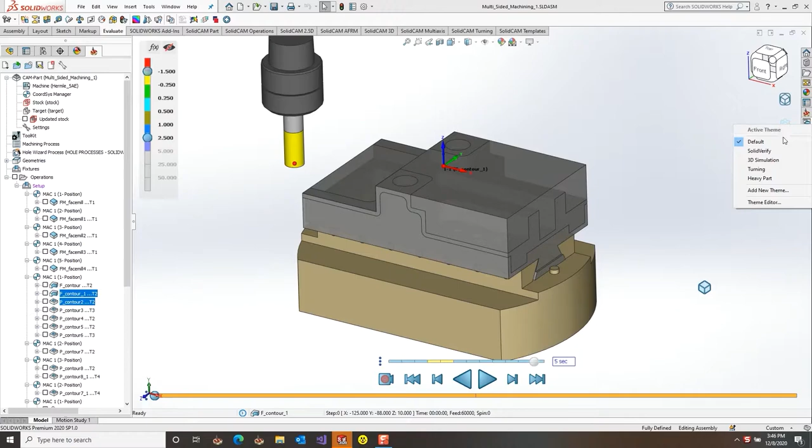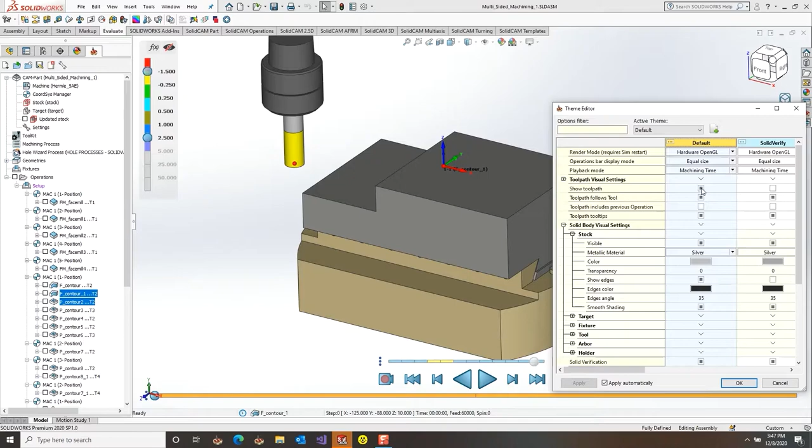Let's begin by making some changes to the existing themes. For the default theme, I would like to make 3 changes. First, I would like to hide the target. Second, I would like to remove the transparency that's on the stock. And then third, I would like to hide the toolpath. Pressing OK will save our theme, and we can play.

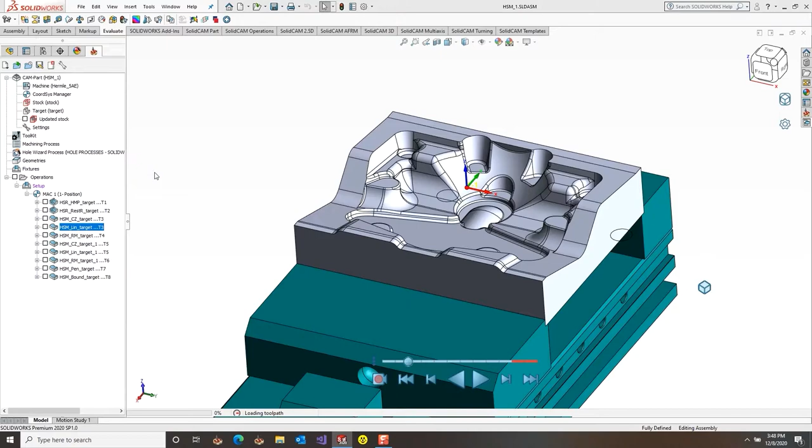I am opening an HSM part so that we can make our own theme for analyzing toolpath. We will duplicate the Heavy Part theme and call it 3D cutting only.

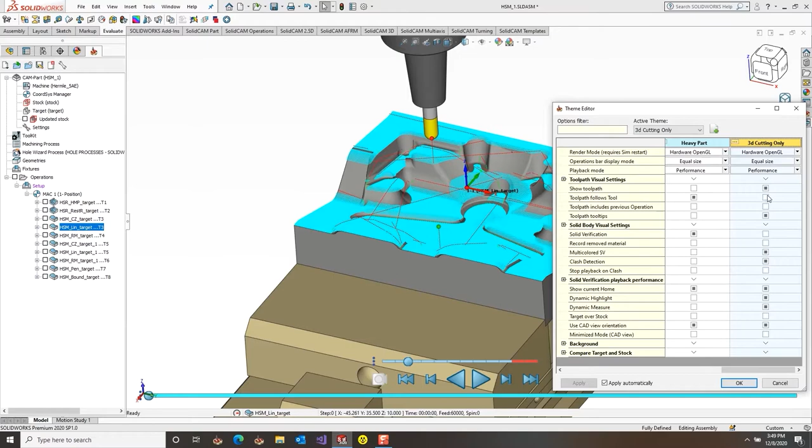What I would like to do is to deselect follow the tool so the whole toolpath is visible. And second, I would like to deselect visible from the rapid cuts. And I would like to do the same thing also for the links.

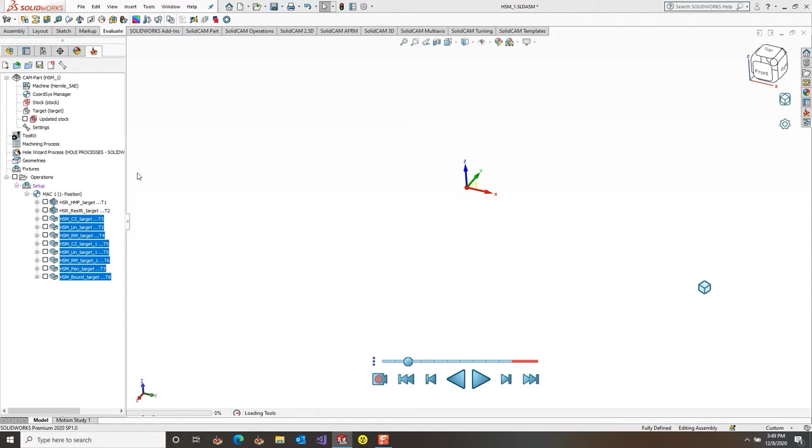Now that our theme is saved, I can load all of the toolpaths and I can review them. I can review them by using the skip operation forward. And what we see is only the cutting movements without any links or rapid moves.

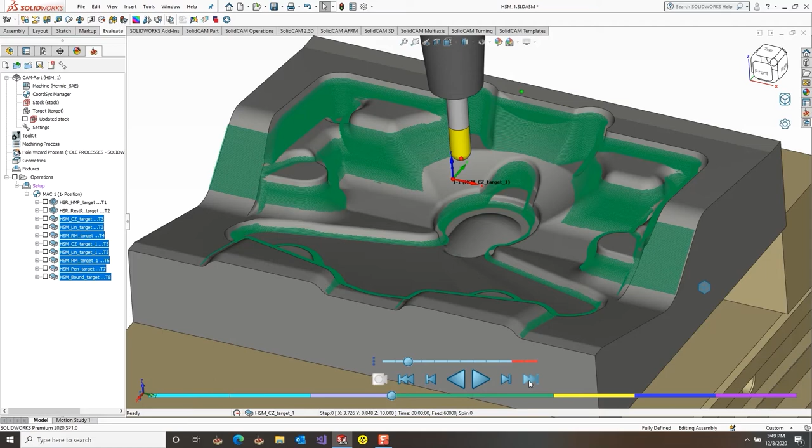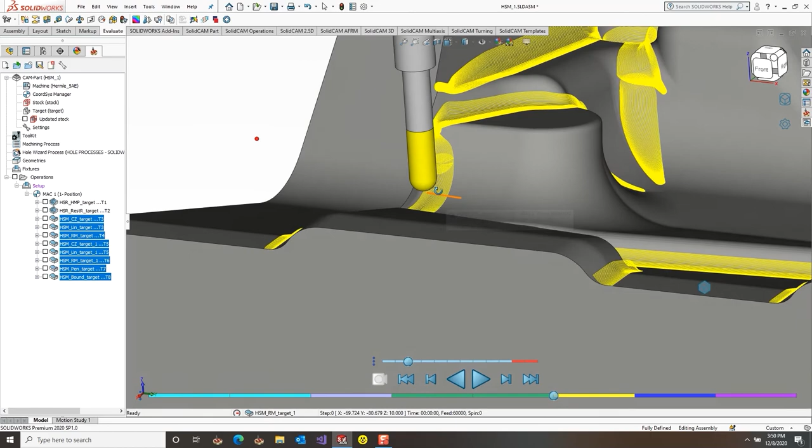Now clicking anywhere on the toolpath will reposition the tool at that point for additional inspection. Double-clicking on the toolpath will reposition the simulation slider at that point, and we can press play to visualize from that spot.